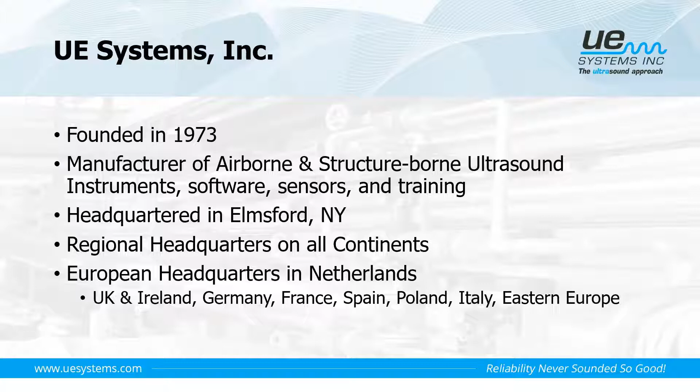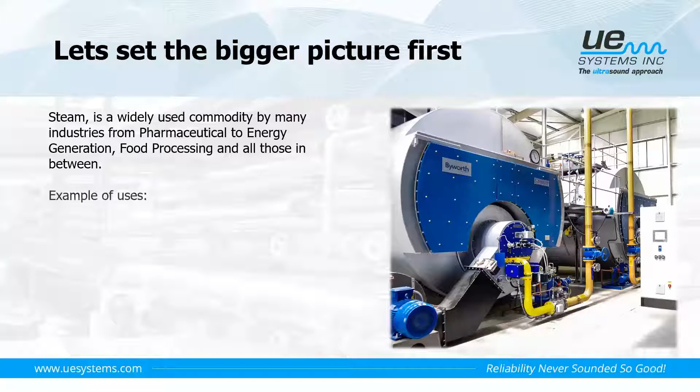So let's set the bigger picture for today's webinar. Steam is a widely used commodity by many industries, from pharmaceuticals to food to energy generation to food processing. There's many applications and industries that use steam for many different things, from heating to cleaning, moisturization, sterilization. We get lots of different uses from steam itself.

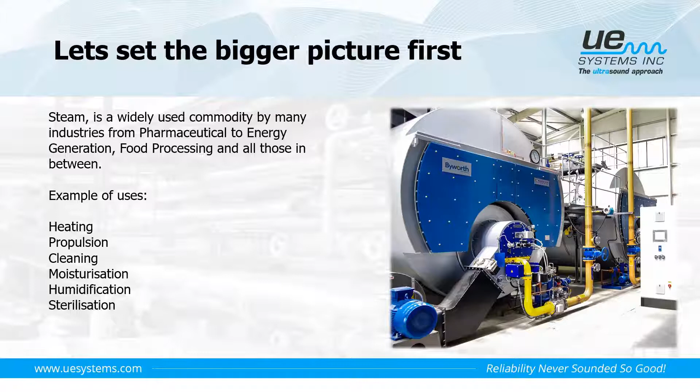Now, no matter the way that a boiler or steam system is fueled, a large amount of energy is required to generate the steam. And having an efficient steam system will also optimize our plant's energy consumption. With a heating process, there's always going to be a fight on its hands with cooling variables, wanting to cool the system down and use that energy to keep the heat at its optimal level. That's why we have specific assets in place around our steam system to help remove this cooling process, in turn keeping our system efficiency up.

Now, operating costs can increase by as much as 33% if there are faulty components within the system as well. So we need to keep on top of those and look at how we can keep on top of those to keep our efficiency at its optimal level.

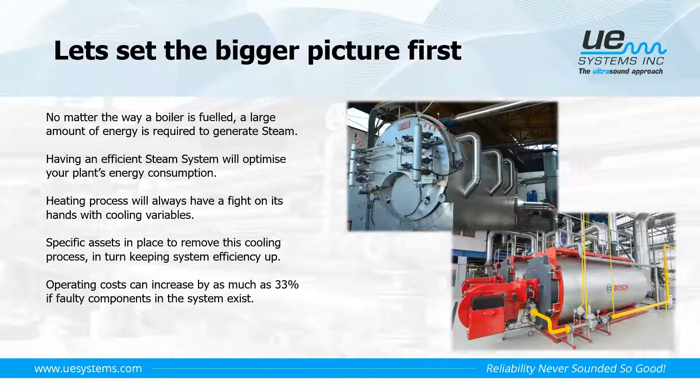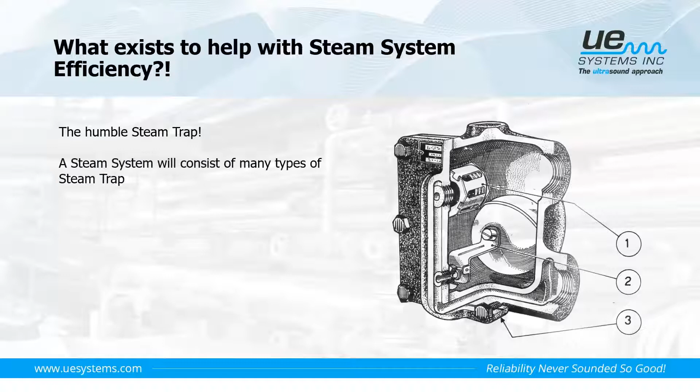So what does exist out there within the system itself to help steam system efficiency? We look here in this webinar at the humble steam trap. Lovely little thing. The steam system will consist of many different types of these traps, depending on the amount of steam being processed, the use of it, and how it's being used. Now, the operation of the trap will affect the system's efficiency, and we're going to go over that a little bit further as we go through this.

But what is a steam trap and what is its purpose in life? Now, I appreciate that some of you will have a lot of experience and knowledge in this field, but I'm just going to go over some basic concepts behind it, how it works and why we have it there, and how we then go on to inspect it and understand the condition of these systems.

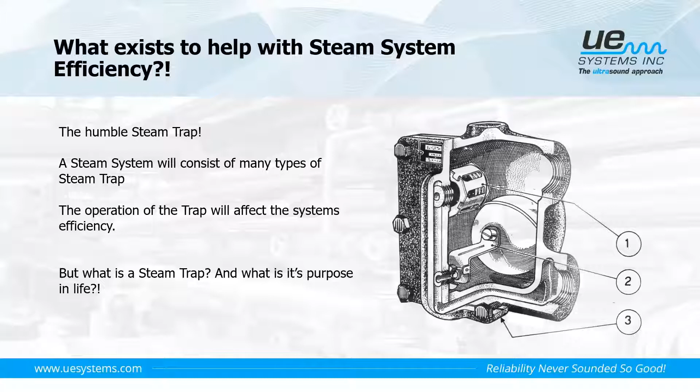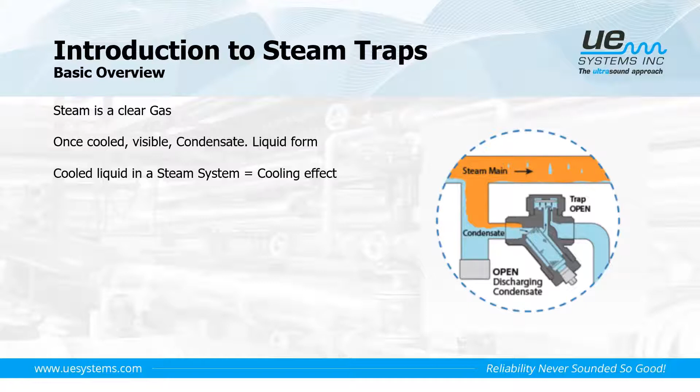So first of all, yes, steam is the clear gas. Once we start seeing, say for example, leaks, we start seeing plumes of what people sometimes call steam. It's the vapor phase. That's the condensate, it's the liquid form. If we have that cooled liquid in a steam system, we're going to then start speeding up the cooling process of the steam, so we need to have that removed. And if we have liquid in a high pressure system, we're also going to get problems like water hammer.

So the steam trap itself is designed and implemented into a steam system to help us with venting unwanted air and gases, removing our condensate from the system, but holding back the steam. That way we can keep the heat and the optimal temperature at its best, hopefully improving our energy consumption.

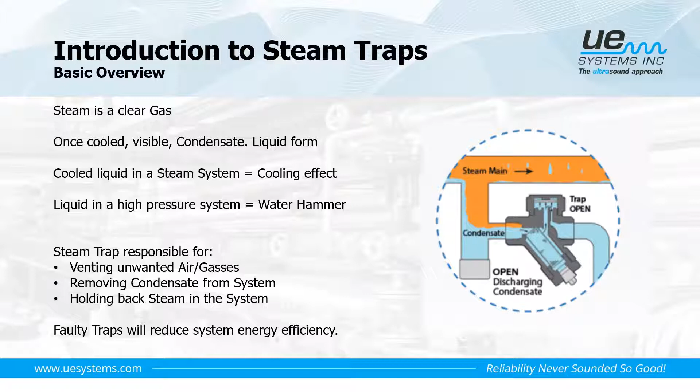If we have faulty traps within the system, it's going to reduce our system energy efficiency, because it's going to just speed up that cooling effect again, putting more pressure on the boiler to keep that temperature up.

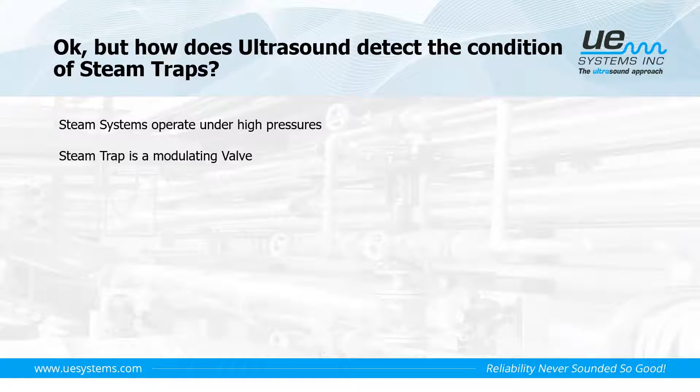So how does ultrasound detect the condition of a steam trap? Steam systems operate under high pressures, and our steam traps operate like a modulating valve, opening and closing, removing the condensate, holding back the steam. And as the medium travels through the trap or valve, it generates turbulence. And as we know from previous webinars and discussions, turbulence generates ultrasound.

And we can use the structure-borne ultrasound inspection method with our probes at 25 kilohertz, for example, and we can listen for the modulation of the trap or also for any leakage that we may hear.

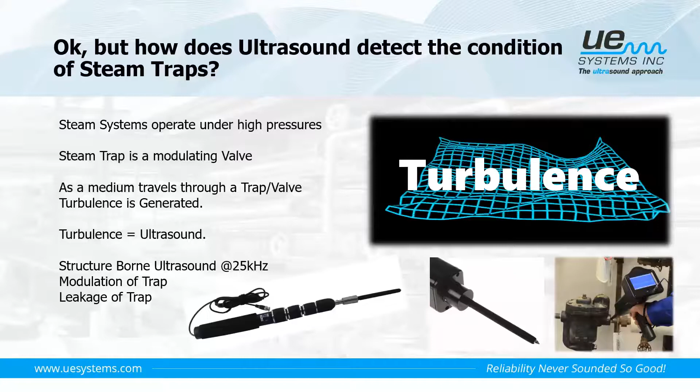So we have two types of operation when it comes to steam traps. The first being a continuous flow type trap that will allow a continuous flow of condensate, normally in areas where we have a higher buildup. And then we also have the on-off type trap that will open and close as we get a buildup of condensate. And we'll go into the different types a bit further as we go along.

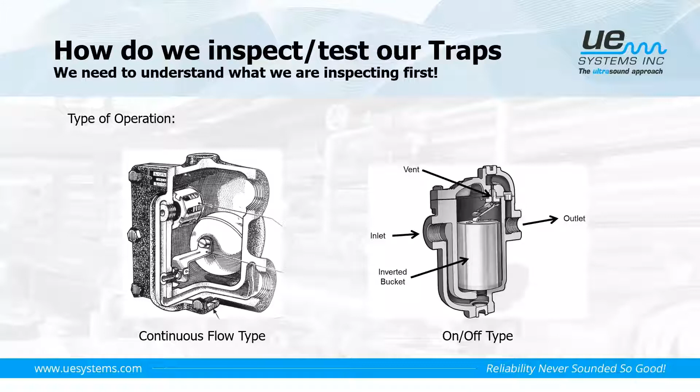So what do we do and how do we inspect? If our probe has the ability to frequency tune, we will tune our frequency centered on 25 kilohertz, and we will also have the steam application selected within the settings of our probe. If we have a probe that is not so sophisticated, that is a fixed frequency, we can still listen to the trap. It might just be that the sound quality might not be as accurate or as detailed as it would be if you could tune it to 25 kilohertz.

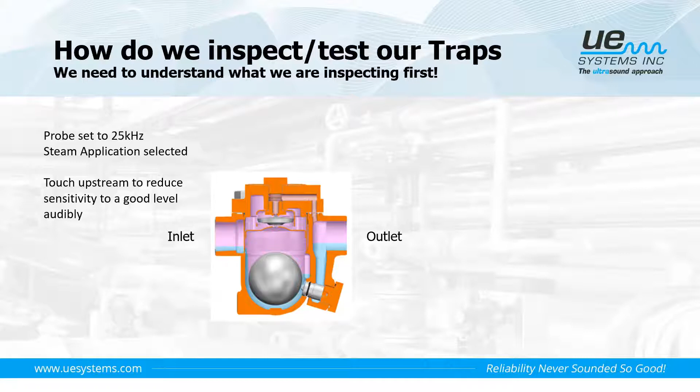What we would do first of all, using the contact probe, is touch upstream of the steam trap to get a level of the sound, reducing our sensitivity to make it audibly sensible for us and not too loud. And then from there we touch the outlet of the trap and listen for the turbulence as it cycles, because where we're going to get the turbulence is at the outlet of the trap. So we can listen for it opening and closing, or we can also listen to the continuous flow.

And while we're doing that, if we have the ability, we can perform sound recordings. So we can compare like for like, which is always useful when performing this for the first time round. So if we're not sure about something, we can then compare it with multiple traps that are like for like.

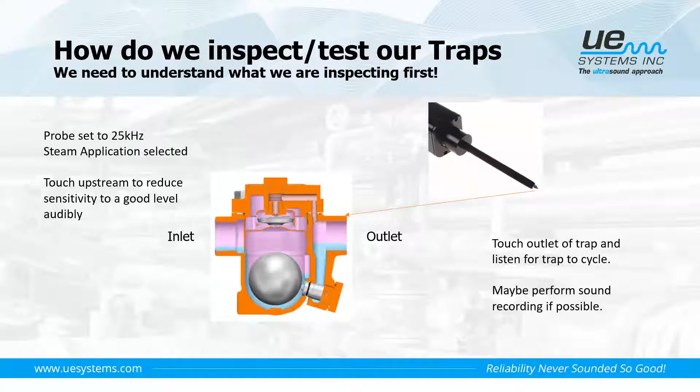So let's start going into a few of the different types of traps and how they operate, so we can get an understanding of what they should sound like. The first one we have is the inverted bucket trap. It's an on-off type of trap, so opening and closing. As the steam turns to condensate, the bucket will drop, opening up the valve to allow the condensate to be flushed through. As it's flushed through and steam returns, the bucket will float back up, closing the trap. I have a sound which I will play now that is an example of an inverted bucket trap.

So as you can hear from that sound, we can hear turbulence increasing and decreasing as it opens and closes, so we can hear a clear cycling of the trap. Another way of indicating the condition of a trap could be through thermal imaging, because for a trap that's operating correctly, the outlet should be cooler than the inlet, because all we're allowing out of the outlet is condensate, which will be cooler than the steam. But that only gives us one part of the picture. That would not tell us that it could be blocked, for example. So we have the ultrasound there to give us the bigger picture.

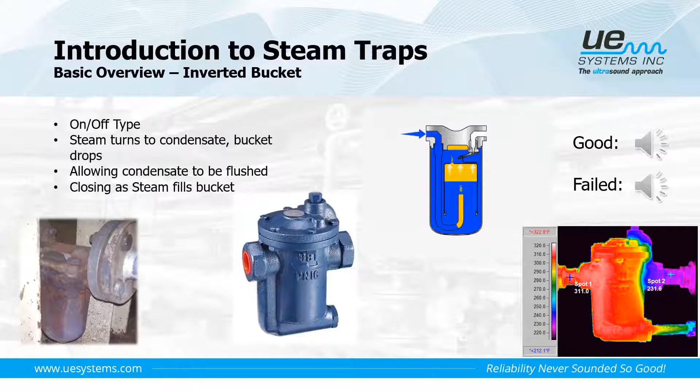Now, here is an example of a failed inverted bucket trap. As we can hear from that sound file, there is almost a constant flow of turbulence. When a steam trap does fail, it usually fails in the open position, so we get a constant blow-through of steam. And from this, we can hear no modulation. We can maybe hear some mechanical sounds there, because there are mechanical components within the trap that could be faulty, causing this problem of not being able to cycle correctly.

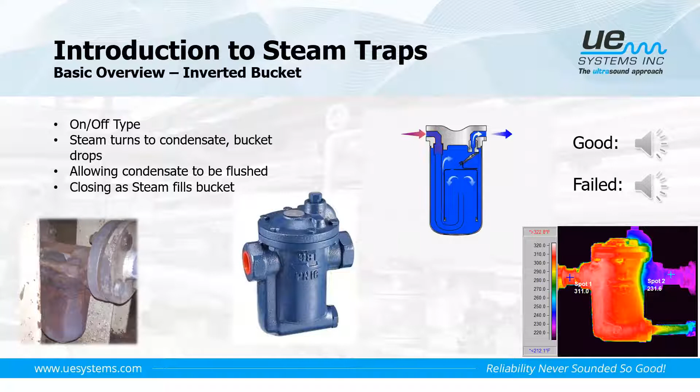Another one that's not so good.

As we can hear from that sound recording there, we're hearing a lot of mechanical sounds, a lot of rattling around inside the body of the steam trap there. And that's going to be down to, like I was saying earlier, the mechanical components within the trap itself being faulty. As long as we understand what type of trap we're inspecting, we can start to understand how it should sound. And this is a good comparison with being able to say that this trap is not working correctly.

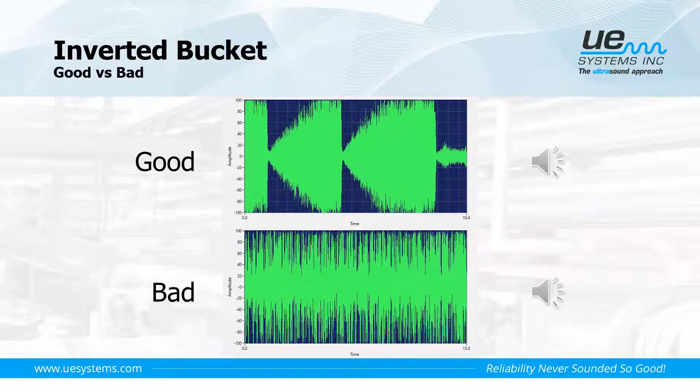So one of the next ones is the thermostatic steam trap. This is another on-off type trap that operates through temperature changes. As the system heats up, we'll see the bellows actually closing the trap off. As a buildup of condensate occurs around the bellows, they will allow them to open up, flushing out the condensate, and as the steam returns, it'll start to close it again.

Now, with these traps, we don't want to inspect them until the system is at full temperature. On startup, these traps are not going to work correctly until we're at temperature. So, an example of a good thermostatic trap. So from the sound file there, we can hear the turbulence increasing and decreasing as the thermostatic trap opens and closes. An example of a failed thermostatic trap.

Bit of a shorter recording, but what we can hear there is clear, visible turbulence, and there's no change in the sound. And for most types of traps, if they fail in the open position, they're going to sound similar. It's that constant level of turbulence with no modulation. So that's our example of a failed thermostatic trap.

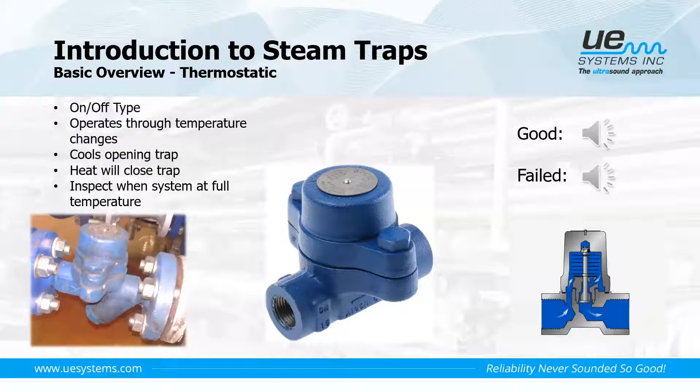One of the more common traps that we see in a lot of sites, and a lot of these dotted around, is the thermodynamic disc trap. Now, these again are the on-off type, more commonly used, and operate by pressure changes between steam and condensate. As the condensate builds up, we see the disc move open to allow the condensate through. As the condensate is removed and the steam enters, the pressure changes force the disc closed and close the trap off.

It's quite a harsh environment for the thermodynamic disc trap, where it's constantly opening and closing. And a good one of these would cycle between 2 to 10 times per minute. So we can always then listen as we do it, maybe time it, and we can then get a gauge of how well it is operating. So an example of a good thermodynamic disc trap.

So as you can hear there, you hear a steady level of turbulence first of all, then all of a sudden a large rise in turbulence as that steam trap opens, and then you can also hear a very clear abrupt halt to the turbulence as that disc is slammed back down to close the trap up again. So that's how we would see that, and we want to see that 2 to 10 times per minute. And sometimes when we can do sound recordings, that can help us with looking at this too. So a version of a failed thermodynamic disc trap.

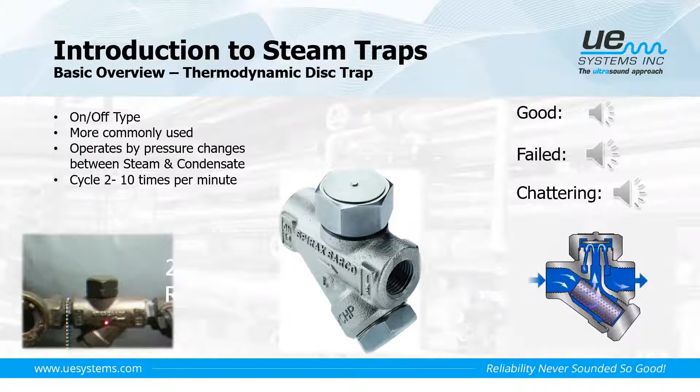So here's some examples of comparing known states to others. So here's an example of a thermodynamic disc trap again in the field.

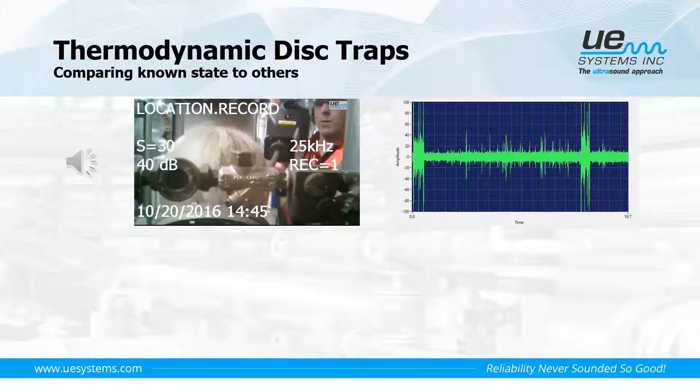So as we can see, we see two clear levels of rises in turbulence that shows us the trap is opening and then closing again, and we can see it twice in 20 seconds. So if we then pull that out to a minute, we can see that we're quite clearly within the 2 to 10 times per minute cycles. That tells us that this trap is in a good state. And we can use this with helping us compare, like I say.

So this might be one that we might earmark for future maintenance work in the near future if we have any downtime coming up, or something that we will keep a close eye on. To actually say, right, we're flagging this one up because it's not working to its most efficient state, and we can replace that quite easily, for example, depending on the scenario that we're in.

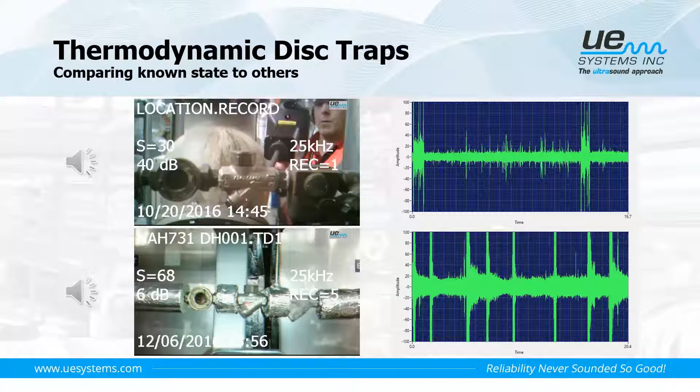So the next one we're going to look at is the float and thermostatic trap. So this is a continuous flow type trap that has a thermostatic vent inside for airs and gases at the start of build-up. And what we'll have in this instance is that the condensate will build up within the body of the trap, and inside there will be a float, either a free float or a float on an armature, that will then rise as the condensate builds up. And as it rises, it will open the trap further to allow the constant flow and removal of condensate.

What we should be hearing inside these when we're listening to the outlet is a steady flow of turbulence, and it may modulate in amplitude as the ball float moves up and down as it allows more or less condensate to flow through. What we will also hear inside some of these traps is the sound of the metallic ball that's floating, and because it's metal on metal floating in a body of condensate, you might hear tapping noises.

And with ultrasound, it's very important to distinguish what sound is relevant and which sound is not relevant, so we can ignore this. So in the next sound file I'm going to play now, which is a good steam trap, you may hear the tapping and knocking noises. You want to ignore that and listen to the turbulence behind that to make sure that it's steady and constant.

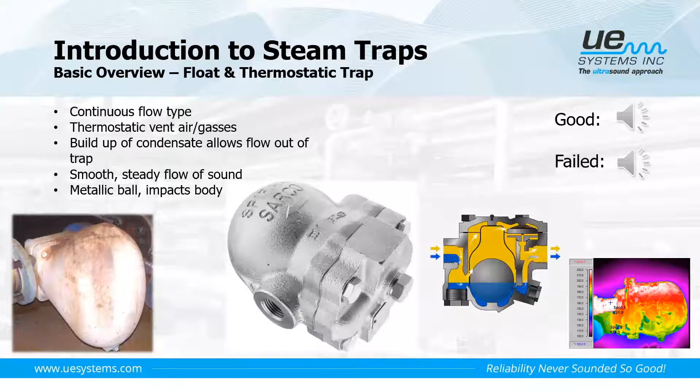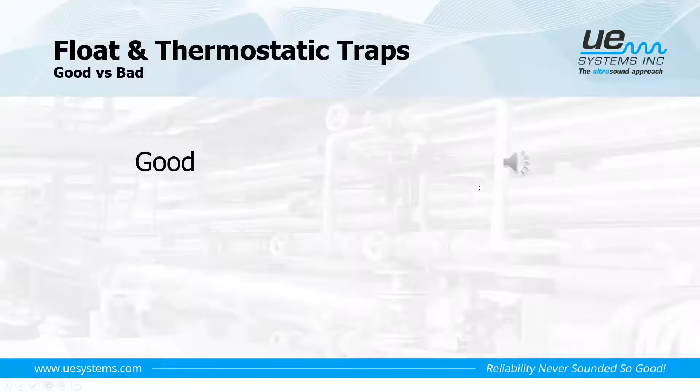And one that's not so good, we hear absolutely no change in the turbulence. We're seeing no impacting sounds from the float that should be in there, which gives us an indication that this is not good. Even if it was, say, a float on an armature that we may not hear knocking around, what we would expect to see is an increase and decrease of amplitude of sound as the float goes up and down to open it up a bit more. So this one is a clear example of a trap that's blowing through.

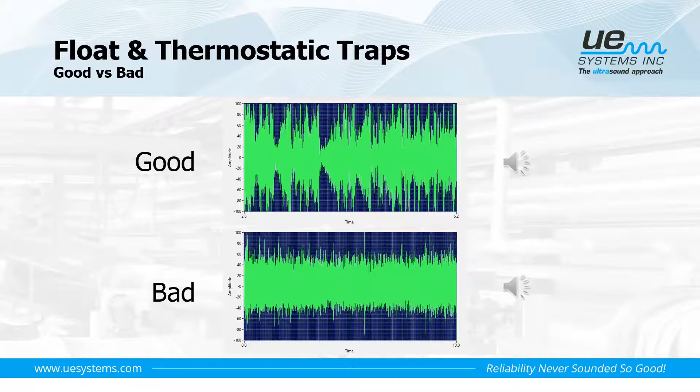So as we're performing our steam trap surveys around sites, it is possible to create reports and report on the condition of our traps and actually quantify the costs associated with failing traps or leaking traps that we identify on our survey.

And that can be done through the UE Systems Steam Trap application that's free to download on Apple devices only, so onto your iPads or your iPhones. And this will help you in reporting on your steam trap surveys as you go through your site.

So with this, once we download this onto our device, make sure at the start that we input the factors, things like the cost to the site to generate 1 ton of steam, for example. Also, the running time of our systems. We might want to set up our leak percentages, because if we identify a leak, well, how much is it leaking by? This is a hard thing to actually quantify.

So what I would normally do, my personal opinion, is that I would set anything that's leaking at around 40%, just to keep it on a conservative level. And then when something's blowing through, I don't necessarily put it down as 100% blowing through, but I'll put it at 80%, again, to be on the conservative side of things.

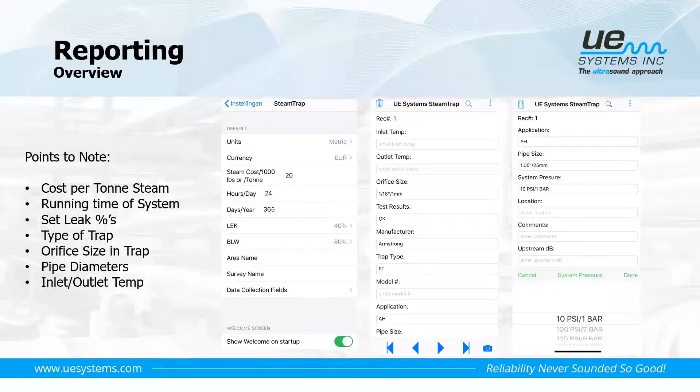And then once you've completed that, you can generate a simple report, and it will be emailed to you, so that by the time you get back to your desk, you have a fully itemized Excel spreadsheet reporting on the condition of your traps, whether they're good, blowing through, or leaking. And that way you can get an appreciation for the potential losses that you're facing on your steam traps.

And going around many sites over my time, seeing tagged steam traps that are faulty or blowing through, you ask them how long they've been there, and they've been like that for a few years, and they say, well, the steam system's fine. Well, it might be fine, but the energy costs are probably going through the roof because of these faulty traps. So by identifying faulty traps, you can see a return on investment quite quickly if you then implement the repairs that are required.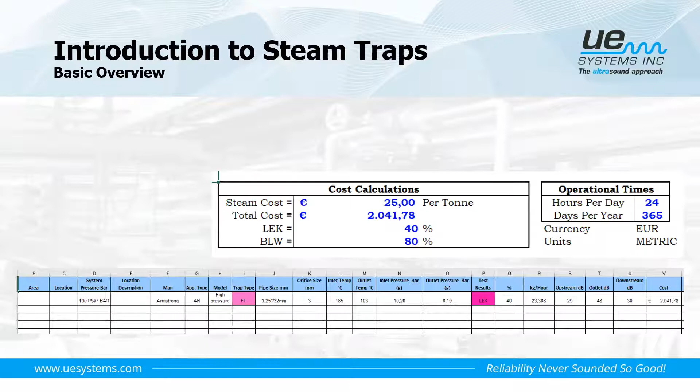So yes, ultrasound is fantastic for picking up conditions of steam traps. Now, this is more based around the mechanical based traps. There are limitations sometimes as to what we can identify and how we identify it, and I want to share that with you, so you are aware. It's something I've come across, where people have identified something as faulty, but it actually isn't, because of the way it's designed and the type of trap it is.

These are the fixed orifice type traps that have no mechanical moving parts. Because they have no mechanical moving parts, they are a bit more reliable, because there's less to go wrong with them. They operate off a back pressure design, so it allows a continuous flow of condensate through the steam trap itself. So when you inspect this with ultrasound, it may sound like it's blowing through, and people doing these inspections can commonly misdiagnose a trap to be failing when actually it's not. This is why it's really important to know the type of trap you are inspecting.

I've listened to quite a few of these fixed orifice traps, and it sounds more like a modulation of turbulence, like blow through almost. So using temperature to help you understand the condition of these can be useful too. But just remember, if you're looking at a trap that you believe is a fixed orifice and you hear a constant level of turbulence, that does not mean that it is faulty. It's probably doing its job correctly.

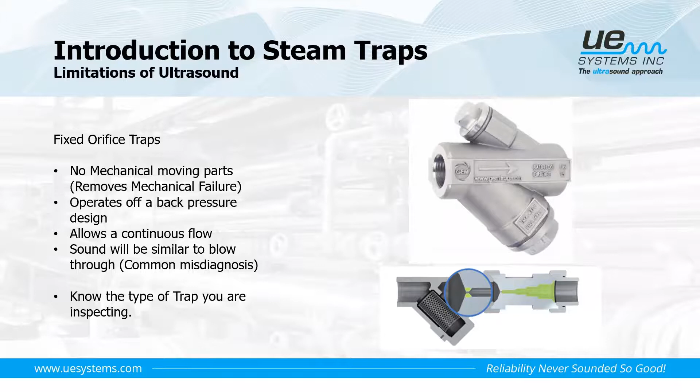So that's one way we can help improve the efficiency of our system, by looking at our steam traps. They're the quick, easy ways of doing an inspection to identify these. Another way of helping improve our efficiency is improving our external leaks to atmosphere. We've all seen them. You see your big plumes of condensate and vapor going into the atmosphere, and they've been there for a long time and everything's still working fine. But these leaks are costing you money. These are expensive leaks. So if we can repair these, we can make significant improvements to our efficiency.

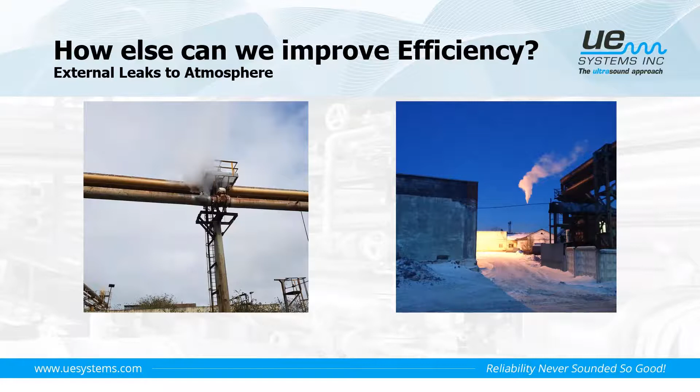An example here of a 3mm leak site under 7 bar of pressure, when it's costing the site around £20 per ton of steam, the approximate cost in losses just by one leak alone like this could be around £4,500 a year, depending on variables, of course, but it's expensive. That's the way that we see it. And with ultrasound, because there's turbulence at a leak, we can identify these quite clearly if you can't already see the plumes of vapor coming out.

So a quick question coming in asking, would it be better to check the temperature of the steam side and condensate side to make sure what you find by ultrasound is understandable? Well, yes, that is correct. Thermal imaging and ultrasound do work well hand in hand. Now, say for example, you've just used thermal imaging alone and you see that the outlet side is cooler than the inlet side. That's an indication that steam isn't passing through, but it's also an indication that the trap could be blocked, for example. So we get part of the picture,

and that's where using ultrasound alongside the thermal imaging would help us get the bigger picture. So it would almost enhance what you're doing, and it'll confirm what you're finding. So if you see through a thermal image, you have your cooler outlet, and then you listen and you hear that there's cycling, you know that you've got a good operational trap.

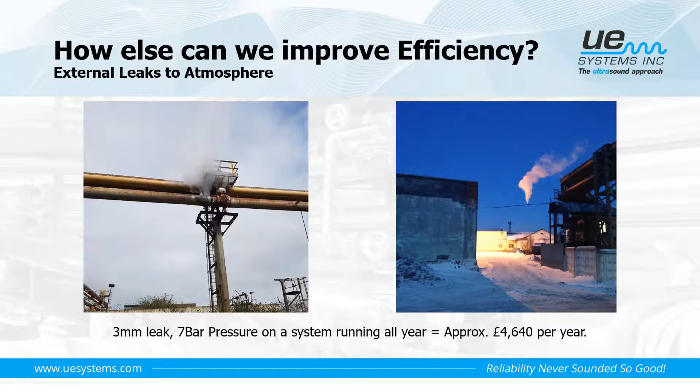So on to the next part. Another one is lagging. Having lagging on your steam pipes, on your systems. I've been to many sites where you walk around, you see all the steam pipes on the outsides of the buildings of the sites and there's not much lagging on them. And having pipe insulation can provide significant energy savings by preventing that heat loss over longer distances, by having some sort of thermal resistance and reducing heat flow from the pipe to the outside atmosphere.

This can then relate to our energy savings. Another reason for insulation is the economy side of things. A well-insulated pipework system will help cut the running costs and save on maintenance, because we're trying to prevent that cooling effect. And also, steam pipes are going to be extremely hot. So safety is also paramount to consider when it comes to actually doing lagging.

Also, when it comes to steam traps, we don't necessarily need to insulate all of our steam traps, because there are certain types that require some sort of cooling to help them operate efficiently. For example, thermodynamic or thermostatic. If we hold that heat in too much, it might reduce their efficiency in how they operate. So make sure when you're looking at your lagging, look at the type of trap that you're trying to lag, and will that lagging affect its efficiency? Some will, some won't be affected.

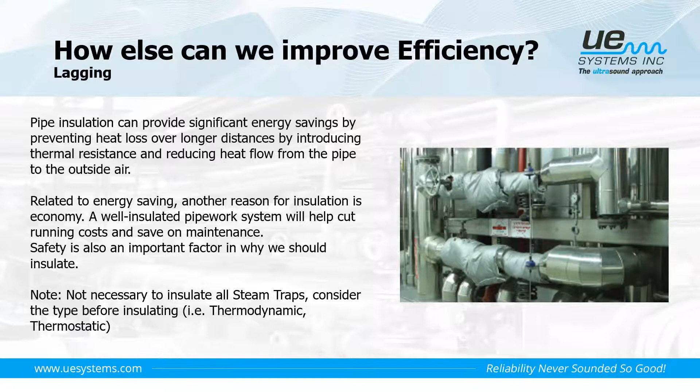Think of float thermostatic traps that just operate off condensate flow. Having one of those lagged would not cause any significant issues with the efficiency of that trap. Whereas a thermostatic that relies on temperature changes in condensate may not operate as efficiently if it's lagged, because you're holding the heat in.

So another quick question coming in, can you test steam traps that are used in a vacuum system and also at very low steam pressures? So yes, even though it's at a very low pressure, as the steam trap operates, there's going to be some form of turbulence. And as long as there is turbulence, there will be ultrasound generated. So that's what we're listening for. And just like low pressure external leakage, for example, that still generates turbulence and ultrasound, so we can still pick that up.

These probes are very sensitive, so you can adjust your sensitivity to listen for lower emissions. So maybe on lower pressure systems, you would have a higher sensitivity. So I hope that answers your question there.

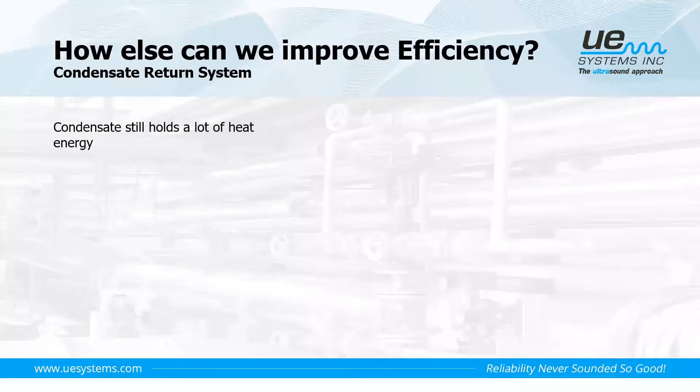So another way we can help improve the efficiency of our steam system is to look at condensate return systems. How do we deal with our waste condensate from our system? Are we disposing it to waste, or are we recycling that? Condensate itself still holds a lot of heat energy. And by returning that condensate to our boiler feed water, it can help improve our energy usage to the boiler by up to 10 to 20%, because the heat's already in there, so we're not requiring as much energy to return it back to steam.

And also, condensate, when it's being disposed of initially, is still technically too hot to be disposed direct to sewage. And having a condensate return would reduce the processes needed to cool it prior to disposal as well. So this is something else to think about too, improving our energy efficiencies.

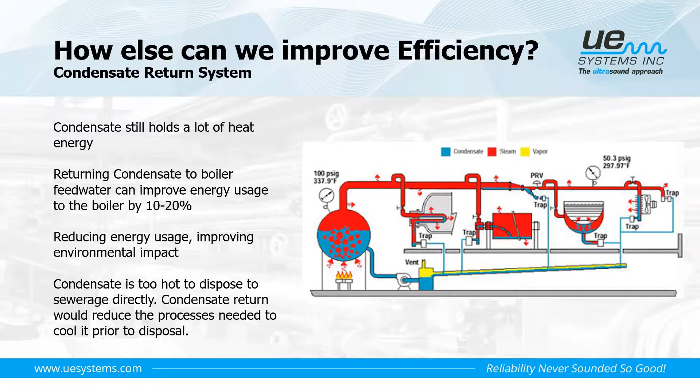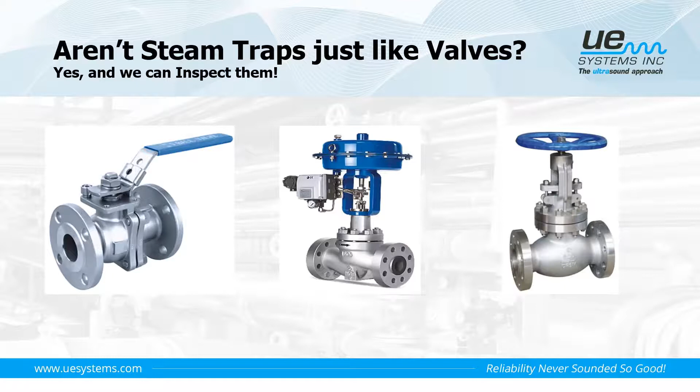So another thing with steam traps is a steam trap can also be seen as a valve. And of course, we have many valves around our sites. And do we know the condition of them? If we've got one leaking, are we only just finding out because something's at the end of the pipe system that shouldn't be there? And just like testing steam traps, we can test valves.

And with the same sort of principle as inspecting a steam trap, we can listen to the turbulent flow from a trap if there's a leak. So if we have a leak at the seat of the valve, we will get turbulence. And what we will do is use a contact method of ultrasound again for listening for that turbulent flow.

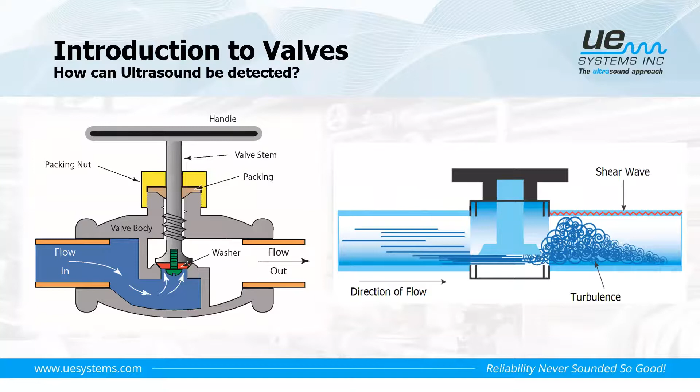And the method that we call on for inspecting steam valves is the ABCD method, where we would take 2 readings upstream of the valve, and the distances would be at times the diameter of the pipe away from the valve, and then 2 readings downstream from the valve at the same sort of distances. We can then take a decibel value of each of those points, compare them, and from that comparison, we can determine the condition of that valve.

And the rules are quite simple. So we have the ABCD, AB upstream, CD downstream. So if point C is the highest decibel value, the valve is leaking. If the sound from A through to D starts to go down and down and down, the valve is now closed because there is no turbulence being generated. If the values are either the same or extremely similar, the valve is fully open.

Even if the valve is slightly open or slightly closed, however you want to see your glass half empty or half full, it will generate turbulence. So you want to understand what state the valve is in when you're inspecting it as well, because having a valve half closed will generate a lot of turbulence.

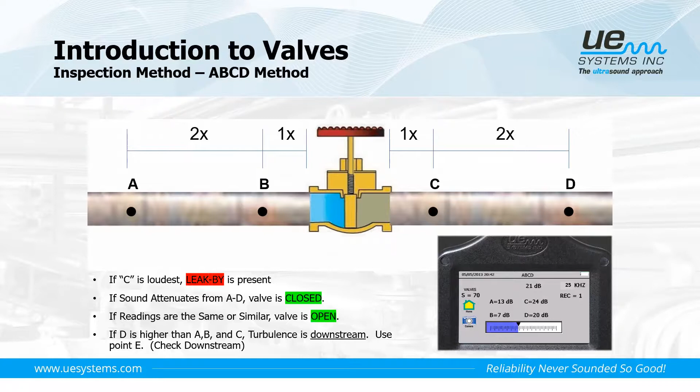So in conclusion to these discussions, as we can see, steam systems are great assets at transferring heat energy, but they also require a lot of energy and fuel to keep them running. And if we have poorly maintained systems, it's going to dramatically reduce the efficiency and increase the energy usage on

site. If we can perform steam trap inspections to improve our system efficiency, utilizing ultrasound for this method is very simple and effective. And if we then use the reporting tool alongside this, we can help quantify and show how much we can improve our energy savings by making the required maintenance practices to improve our steam traps.

So we have a quick question there about how much distance do we keep between points A, B, C, and D? As you saw on the screen there, it was 1 times and 2 times the pipe diameter. So say, for example, you have a 3-inch diameter pipe work. Point B would be 3 inches away from the valve, and point A would be 6 inches away from the valve, for example. Okay, but it's just keeping a uniform distance on each point to make sure that we can do that check.